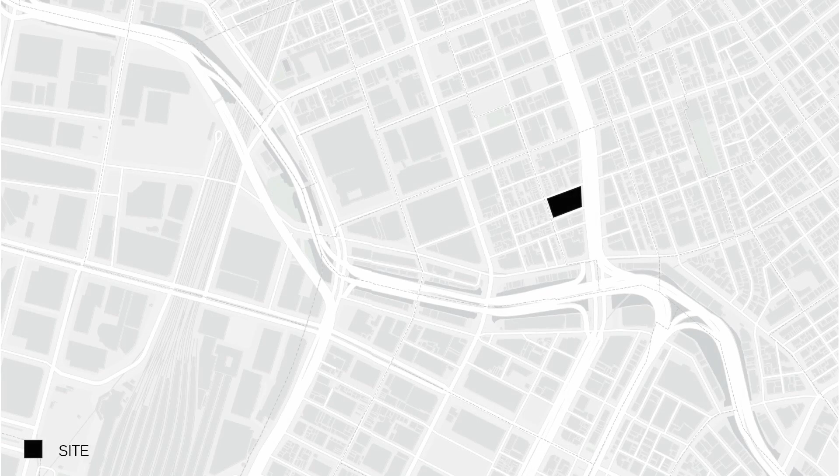Our site is located in the heart of Tokyo, in the historic district of Nihonbashi, in an optimal position to bridge the life sciences to the Nihonbashi community. To the north is the Life Sciences District, which includes Mitsui Fudosan's LINK-J facilities, a laboratory and co-working space that supports the growth of Nihonbashi Life Sciences.

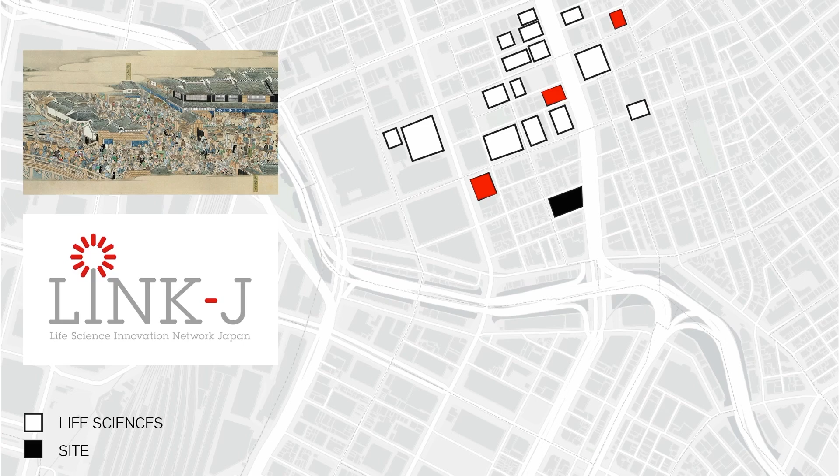To the south of our site is Mitsui Fudosan's future waterfront redevelopment project, which plans to bury the Shuto Expressway beneath the Nihonbashi River to resurrect a historic water-centric community of exchange. Additionally, an international life sciences hub is to be constructed as part of this redevelopment.

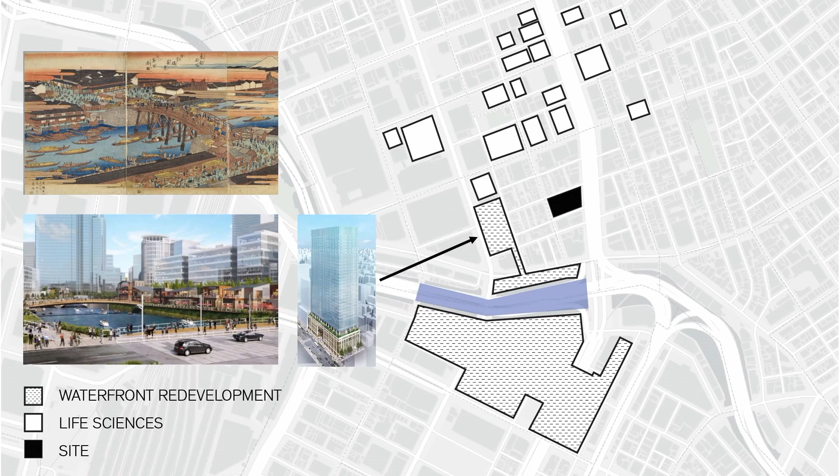Polymix draws together these powerful adjacencies into a dynamic equilibrium on site, working to pair the complex Nihonbashi ecology with the strengths of the super-aging population.

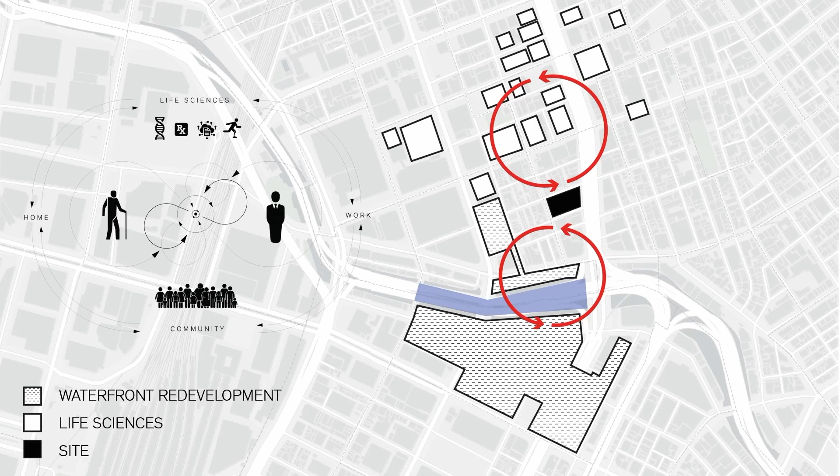Per the zoning requirements and Mitsui provided standards, a tower with 20% commercial and public space, 70% office, and 10% residential or hotel is the optimal development for our site.

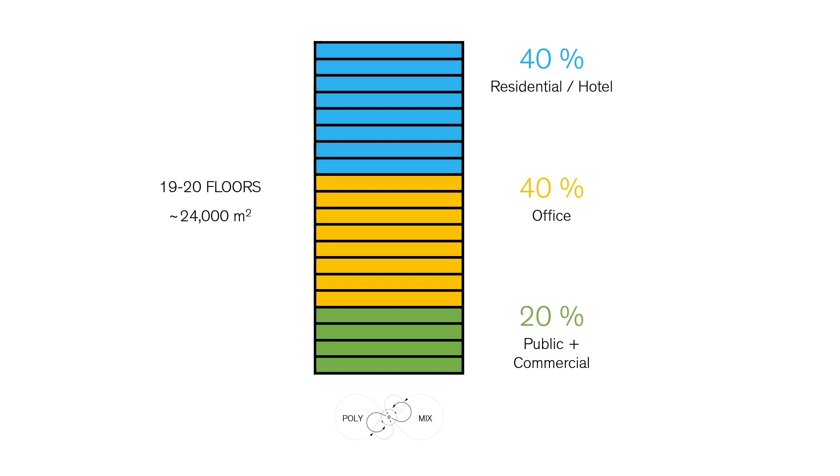To fulfill the goals of Polymix, we propose an increased amount of super-age housing that works to activate the tower as a dynamic polyprogrammatic equilibrium.

To achieve this vision, the design of Polymix is driven by a polyprogrammatic ecology of social and economic exchange. What's left for Polymix is to develop the architectural typology that best supports this dynamic equilibrium of interaction and exchange.

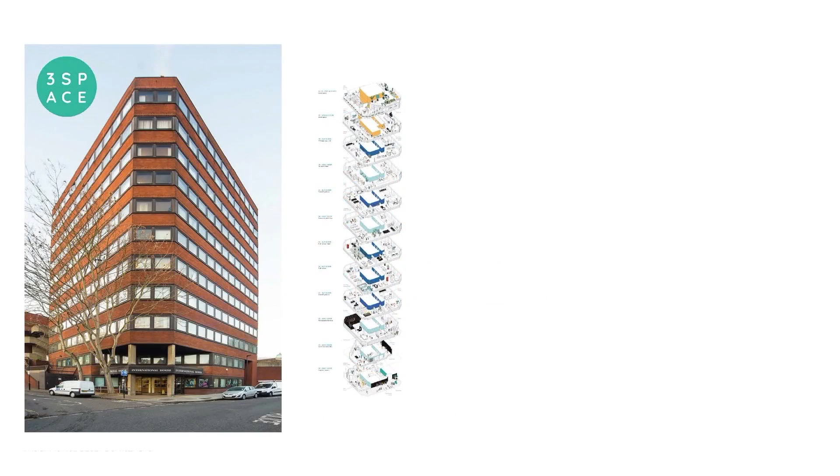Polymix is influenced by research into many competitive cases of unique mixed-use developments. International House by 3 Space is a converted government building that creates a dynamic ecosystem of tenants that support each other socially and economically through a buy-give relationship.

Polymix is set to reach beyond these unique examples of mixed-use buildings and test the limits of architecture that is designed for polyprogrammatic interaction. Nihonbashi has always served as a stage for innovation. Polymix is its next step into the future.

Enforcing the concept of our Polymix ecology diagram, this project proposes a new building typology that challenges the typical programmatical hierarchy of the mid-rise tower.

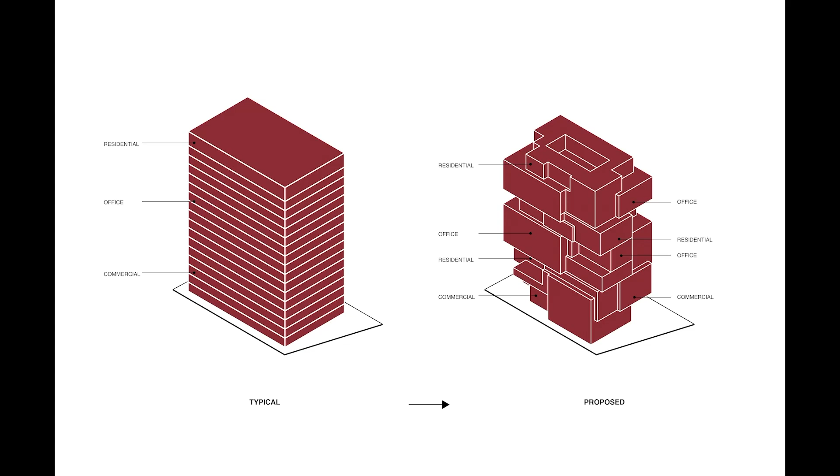Rather than extruding another stacked high-rise tower in the Nihonbashi district of Tokyo, the project is meant to be seen and understood as an aggregation of spaces organized around the 2 cores of the building.

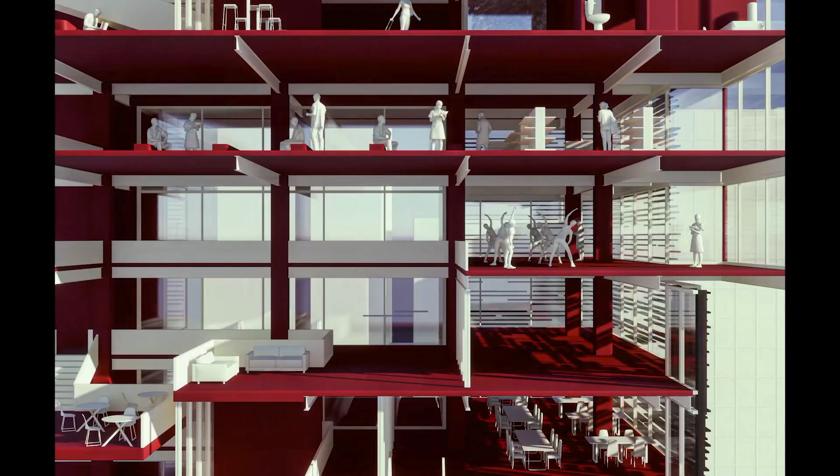The juxtaposition of programs within the building lends itself to a new type of interactivity within a mid-rise tower. Work and home are in a constant symbiosis within the building, enhancing the quality of living of the super-age community and encouraging collaboration between residents and tenants.

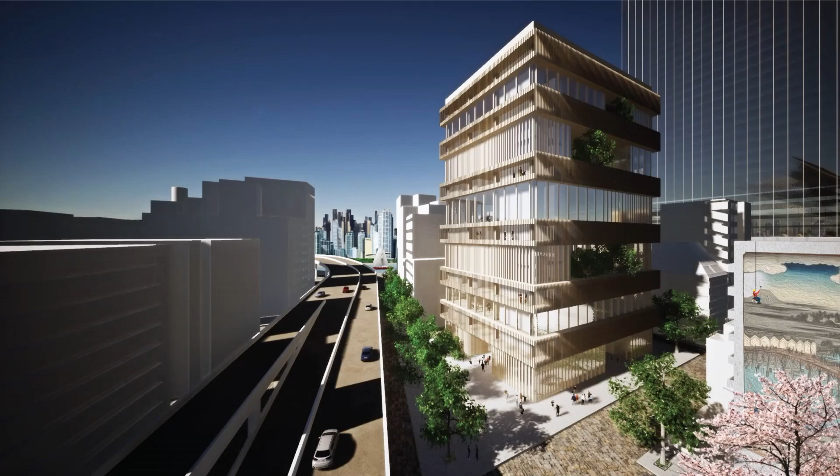Super slab: the architectural mechanism of a thickened slab functioning as super age housing, or a think lab for the super age lifestyle that promotes social interaction and builds new value.

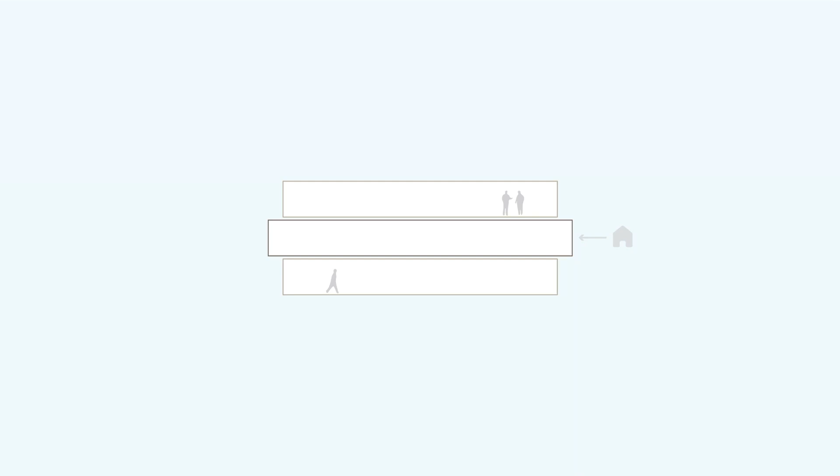We begin with the typical slab construction. Notice that the interaction between floors is limited. By enlarging the slab, inserting super age housing into the interstitial space, and increasing the floor height to allow deeper daylighting, there emerges opportunities to carve new shared spaces into the super slab.

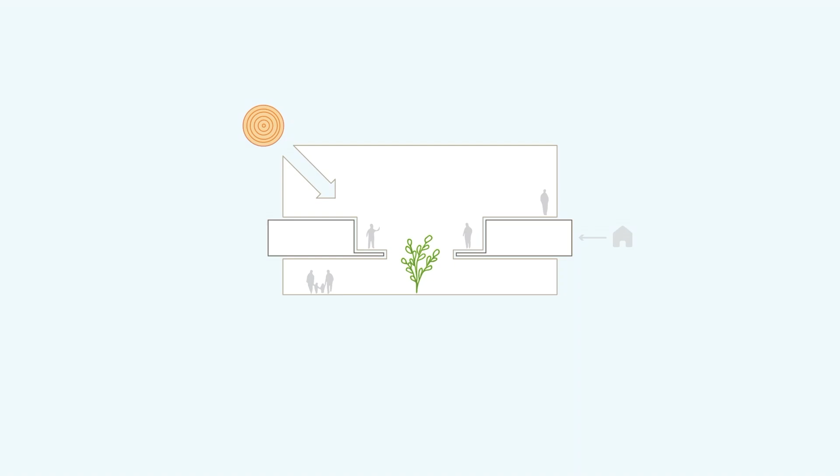This begins to influence the activity and behavior of the programs above and below the super slab, ultimately creating a unique form of mixed-use tower that capitalizes on mutual benefit.

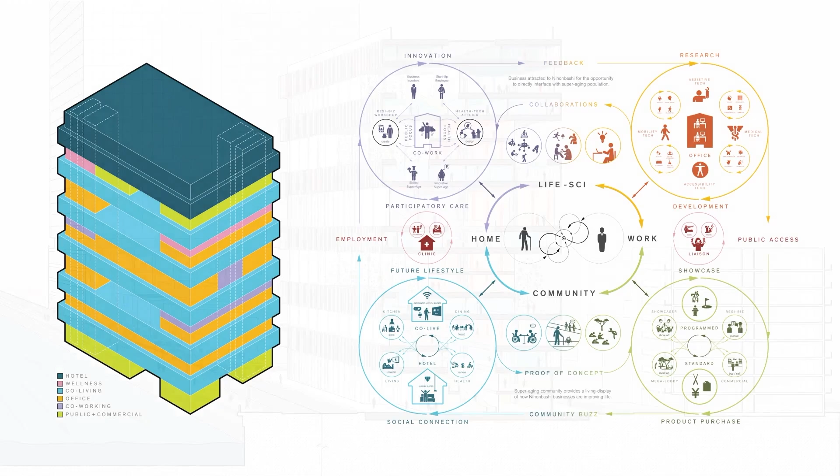The building's massing is developed by utilizing the super slab mechanism as a bridge for the diverse relationships identified in the programmatic ecology. This creates a striated section where several residential super slabs intersect traditional mixed-use spaces.

The ground floor invites the public into the building, providing retail space that adds a warm, louvered atmosphere to Nihonbashi's streetscapes. On the third level, we encounter the first super slab sandwiched in between retail and office space.

Each four-person unit is connected to semi-private perimeter circulation and also opens inward to a public interior atrium. This allows the super-age tenants to access many types of social exchange, whether it be a brief hello in the corridor or a view of the bustling activity above and below.

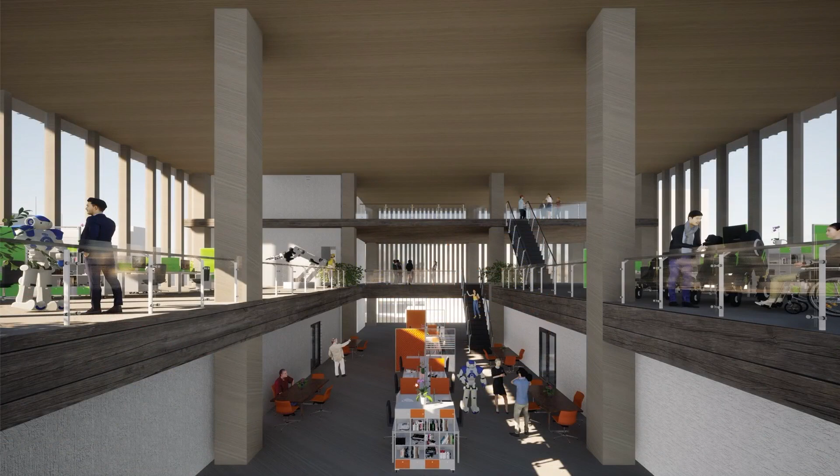On the 8th level, the super slab pairs a super age work-live space with the semi-public perimeter circulation. This promotes collaboration between tenants and businesses focused on innovation for the super age lifestyle.

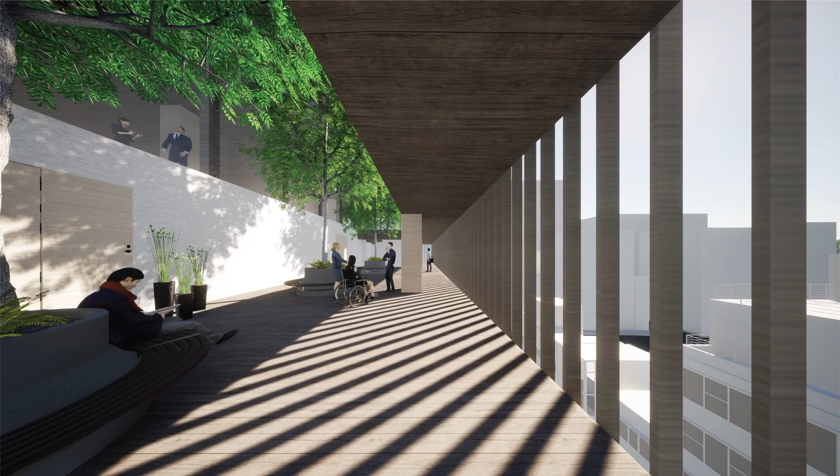In the remaining super slabs, the semi-public perimeter thickens to provide public courtyards for businesses or hotel amenities to share. These spaces provide unique sky courtyards that promote interaction and provide a pleasant environment for the users and tenants of the building.

Super slab is a unique opportunity to provide a new lifestyle for the super aging population, one that decreases social isolation, builds new value for the super agers, and provides a landmark building for Nihonbashi's redevelopment.